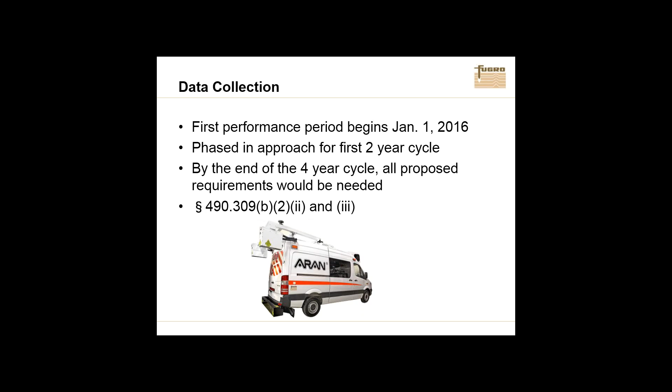The first part of this is I'm going to do some quick review and provide some of Fugro's perspective on MAP 21 and some of the issues that we're trying to raise, as well as encourage you to address and comment on some of these things as well. And then we're going to hear from Mark Suarez of Louisiana DOTD. He's done a lot of good work on trying to show some of the issues that he's been having with the faulting data, as well as some of the cracking distress data. And then we're going to try and open it up a little bit.

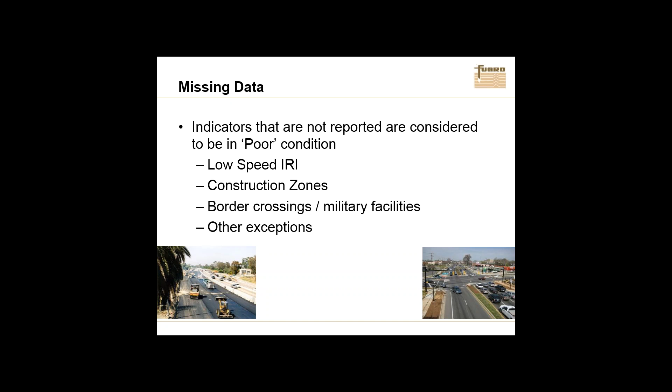And the biggest reason why you're going to need that information sooner rather than later is because you still need to set goals based on these things. And if you're not testing them and you're not trying to measure them relatively early on, you're going to have real difficulty trying to set those goals, never mind actually meet them. So I'd say that's one of the biggest highlights early on, the calendar and the schedule and how quick it's going to go by.

Missing data is another contentious one. Specifically, anything that is not reported is going to be considered in poor condition. However, we've seen in a lot of the data deliveries that we provided to you guys, as well as for anybody who's collecting their own data, there is a lot of data that does get either invalidated or oftentimes removed from the analysis. And there's lots of valid reasons to not want to trust the data even though you have collected it. Some of the more common ones are low-speed roughness. And while this doesn't necessarily apply to the interstate network, it will definitely apply in a lot of your urban areas.

Construction zones. This is probably one of the biggest ones on many of the interstates, where if you have a 20-year cycle, that means probably about 5% of your road network is going to be under construction at any given point in time. So if you don't generate information on that 5%, well, there's your 5% poor. That's set as your mandated rule in terms of your interstate collection. Well, it doesn't apply to everybody.

Border crossings, military facilities. When we're doing data collection, or if you're doing the data collection yourself, there's definitely a whole bunch of areas where people don't necessarily want the video cameras and the measuring technologies. So how big of a buffer can we leave around these, and are they just going to get classified as being poor? There are, of course, other exceptions. While there is still some discussion in the document about being able to temporarily leave out that outside lane, how long is that going to last for?

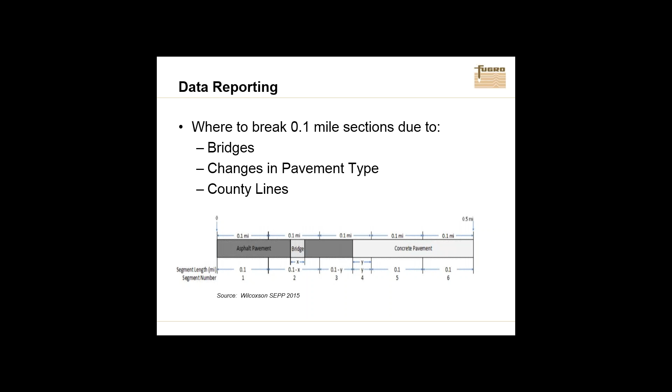One of the next big issues we're going to face is data reporting. Everything's in 1/10 of a mile, and it's tough to give an exact number, but it's probably around half of our customers currently getting 1/10 of a mile and don't have to change the reporting sections. There are definitely some with smaller increments, and some with larger increments. While it may not be that difficult to give two tables in the case where there is a change, that way some consistency can still exist from year to year, as well as continue to meet these reporting guidelines. So the questions are still going to come up as to how we break these things down.

This is one of the biggest issues, and I stole this picture at the bottom from a presentation done at the Southeast Pavement Preservation conference.

What it becomes is there are a couple things where we know we're going to have challenges reporting some of the data. The two biggest ones that this chart clearly shows: first, there is some guidance saying that we do not have to report some of this data on bridges. It doesn't take much looking at your network to know that roughness always spikes on bridges, primarily due to the existence of approach slabs, leave slabs, and all the expansion joints that occur on the bridge. So we know these are going to be spikes, probably above the threshold to become poor. That's a known issue, so they've addressed it by saying we don't need to report issues on bridges. That makes sense too, because clearly you're not going to necessarily have that much cracking on the bridge decks — the surface material there is not necessarily thick enough. But the problem is, how do we remove these bridges?

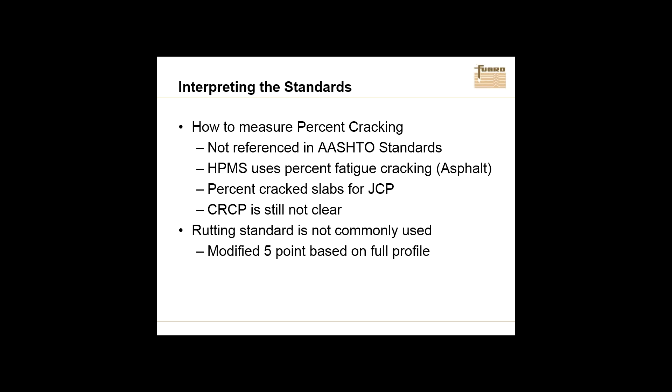You can look at some of the other sources that are also referenced. I've got a copy of the HPMS field manual in front of me, and pretty much for asphalt paving, it just uses percent fatigue cracking. While that may be adequate and not necessarily difficult to measure, the question becomes: how have you historically measured this distress, and is this something you want in addition, or something you're going to start to change and modify pavement management systems to address? In terms of JCP, percent cracked slabs is probably relatively clear.

The only key is we start getting into definitions of what counts as a cracked slab. If you have partial depth cracks, corner cracks, or things such as D-cracking or durability cracking, are these going to count as a cracked slab? While not necessarily difficult, whichever way the rule comes down, clarification is needed to make sure we are being consistent and that this is getting applied the same way for all states.

CRCP is probably the one that is the least clear. While they reference many of the standards, it's not clear how to determine percent cracking at all. They do reference that things such as pop-outs and spalling are to be used in terms of percent cracking, but we're not exactly sure. Does that mean we're just taking the area of the pop-out, or are we taking it as a percent of length? There's a lot of gray area here, and it's not well referenced definitely in any of the AASHTO standards exactly how to deal with that.

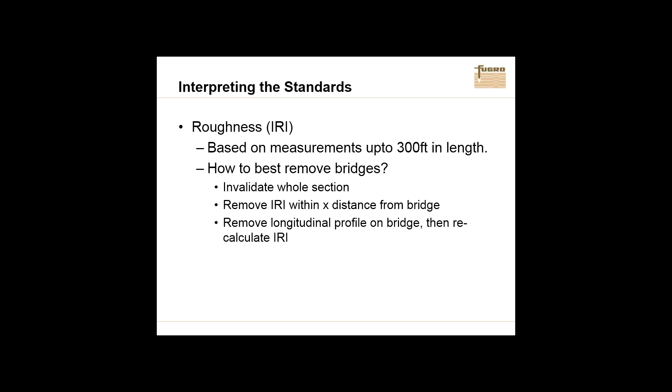In terms of using the whole profile, I would definitely encourage you to read this. Pretty much it is a modified version of the 5-point. It is not using a simulated straight edge or anything remotely like that. In actuality, what it's doing is telling you to take an average value in the center of your roadway, an average value of a range of your profile in both of the wheel paths, as well as on the outside. Then it uses a bit of a rotation scheme to determine what the rut depth is within the wheel paths and to try and determine if there is a center rut rather than in the two-wheel path. So it's definitely a very different system than what many agencies currently get reported to them.

Once again, that doesn't necessarily mean it's bad, it just means it's going to be different. So be prepared that if you're reporting this, you may want to also continue to get your other data reported separately.

In terms of roughness, this is one that different agencies had different amounts of questions about. Some seem to be pretty okay with it. A lot of agencies, specifically the southern ones, who are less likely to be dealing with transverse cracking issues as regularly, thermal cracking, or ones that don't necessarily have frost heave issues as well. It's just important to realize how the IRI is calculated and what this can be impacted by.

First, it's important to keep in mind that the roughness measurements are based on sections up to about 300 feet in length.

As mentioned earlier, we still have discussions about how to remove the bridges. There's discussion already going on with FHWA about whether we want to invalidate the whole section of road—if there's any part of a bridge in that 1/10 of a mile, can we just remove it all? There's still a bit of discussion, though. What happens if the bridge starts just inside the new 1/10 of a mile section?

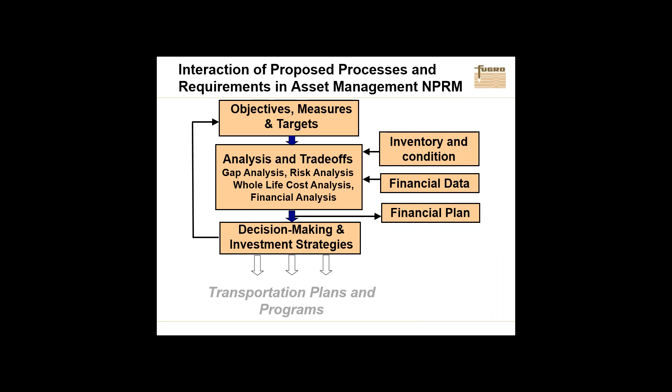The big difference here is this is a relatively new standard. There is an AASHTO standard—it only came out in 2013, and for many of you on the phone, you've been receiving faulting data for many years prior to 2013. There are no other real national standards—no ASTM standard for faulting, no ISO or other international ones, really. There's a whole bunch of guidance on how it can be done, but very little in terms of actual standards.

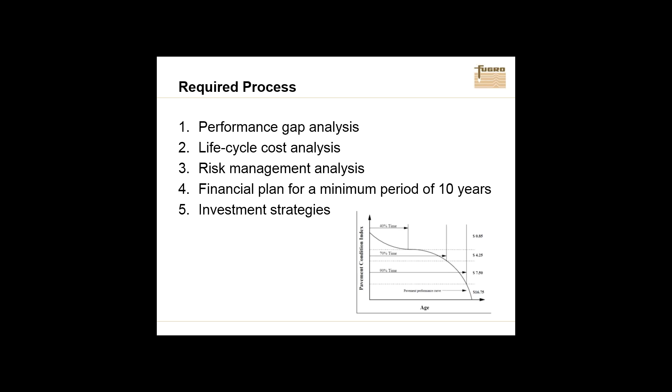The existing AASHTO standard, which I do encourage you to read, primarily uses the roughness-based system—just the laser and the accelerometer—trying to identify exactly where the joints are because there's a small discontinuity in that longitudinal profile.

The key is, if you have a lot of smooth joints, it's very possible to not identify a joint. If it's a smooth, consistent profile, that joint just does not get detected.

What happens, though, is if you have 2 or 3 joints that are badly faulted, this greatly brings up your average. For example, if you have a 1/10 of a mile section and only 2 joints are detected with a faulting of 0.2 inches, out of say 30 joints actually in place, your average would be 0.2, which gets marked as poor condition. However, if we knew all those joints were there and added them in with a faulting height of 0 millimeters, that average would come way down, and suddenly it would be acceptable—a good measurement. So the problem becomes: how can we be sure that all of those joints are indeed identified?

In many cases, in the results being used and the processing being done, a minimum threshold is currently being implemented by many agencies that removes all small faults. And we've done this for years, long before this AASHTO standard, simply because we were afraid of false positives. We would rather remove faults that you probably weren't going to fix and just identify a count as well as an average fault height.

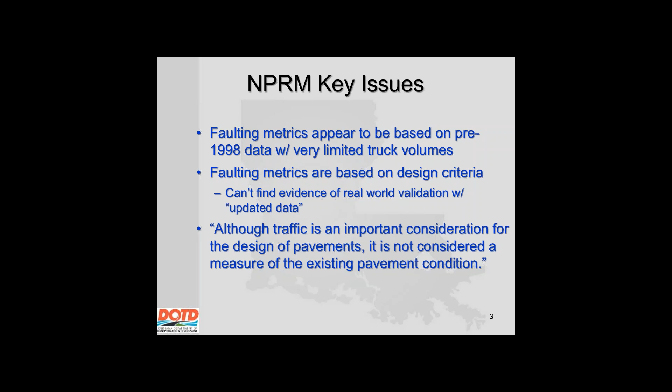So that's why over many years we've had lots of discussions with many of you and set up different rutting protocols. One of the more common questions we ask new clients is, how do you currently manually measure rutting? And inevitably, we show up on site and somebody's holding a straight edge or a piece of wire and a ruler. And we've done our very best to make sure that we're measuring rutting the same way that you have always manually measured it.

The problem is the AASHTO standards, the way they're currently written, don't try to match the manual methods. They try and simplify the automated method. So the short answer to your question is it's not well documented in industry. It's not well documented in standards. But Fugro has all kinds of documentation. If you want more information about exactly how we are accomplishing this, feel free to talk to your project manager or customer support team, and they can help get you some of this information.

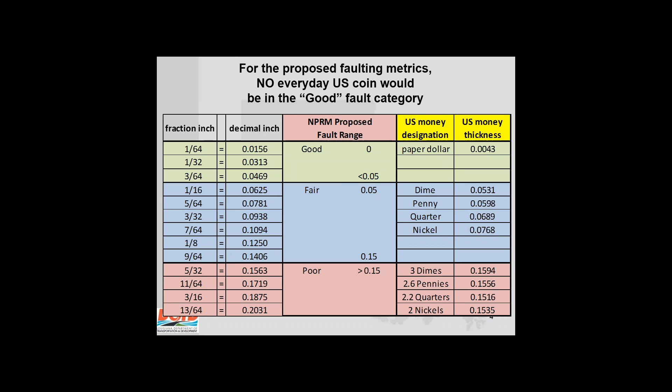Right, at this stage, I'm going to try and turn the presentation over to Mark Suarez. I'm going to try and change the presenter here and give him the option to share a screen. Can you hear us there, Mark? Yeah, I can hear you. Good. Why don't you just bring up my presentation? I'll tell you to advance the slide. That would be easier. There we go. It should be up on your screen, just tell me when to switch slides. Okay, it's definitely up on my screen. Go ahead and go to the second slide.

All right, and that just reinforces what DJ said a minute ago about the dates. May 8th is the National Performance Measure, so it's coming up on us pretty quick. Go to the next slide.

I had a lot of issues with the rules. I've been reading them. It's like 284 pages of rules, and you read all the research documentation that they reference, and you're looking at probably about 4,000 pages to read. They reference all this research and say this is based on research and data. When you really dig deep enough, you can't find the research and data that they used. And I found out that the metrics would appear to be based on the pre-1998 data, where they use like 10 million ESAL trucks instead of the more current volumes that are coming up now for pavement design.

So I think the data's dated, and I think the truck volume's almost minuscule. I had a big write-up about it. I can send it to you all to read if you want, but I'm still working on the document. But the faulting also has some issues.

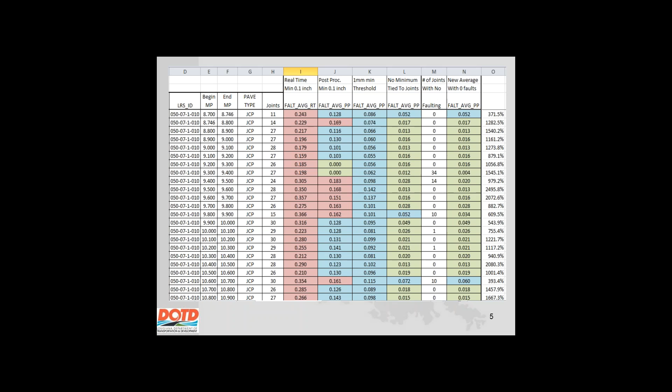And just remember what DJ said earlier, if you find one fault in a 1/10 of a mile segment, whatever that fault is, that's your average for the 1/10 of a mile, one fault. So next slide. We decided to look at some real data. This is an older pavement on an industrial corridor. I drive it every day. In fact, it's the road I use to get to work.

Well, when you look at the real-time data, basically what they do is in the vehicle, they run real-time with a minimum 1/10 of an inch threshold to kind of eyeball the data and make sure it's not way out of whack and they don't have some issue with the sensors. Now, some of these guys are really using real-time data instead of paying for all the post-processing, and this is the kind of numbers you're getting. The red identifies that it's in the current proposed poor category.

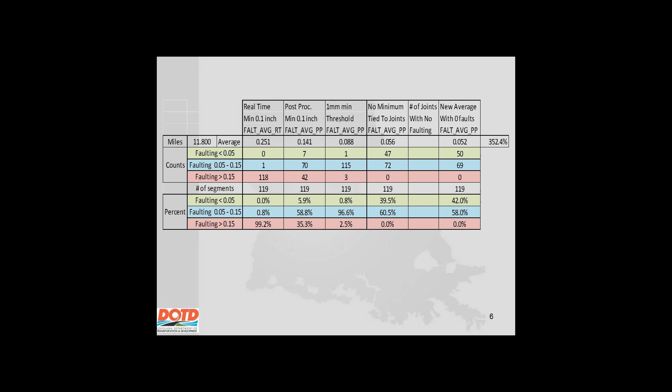And when they post-process that same exact data with the same minimum threshold, they eliminate a lot of false positives and get some better numbers. Clearly the 0 on a couple of those 1/10 of a mile segments is inadequate, but you're starting to see something that makes a little more sense. Okay, now this is this segment.

The point of the slide is if you look at the 1 millimeter threshold that they set, those numbers seem reasonable. You're talking about a very old pavement on an industrial corridor. Those numbers seem reasonable and give you a false sense of security that it's good data. But the numbers go down compared to the real time with the post-processing because they're finding a lot more faults, but they're not finding the fault for every joint. So the numbers look reasonable, and it kind of makes you wonder.

So what I had DJ and them do was go back and identify every joint and set no minimum and run the data again. Now we're looking at the real joints in column L, and it has no minimum. All of a sudden, those numbers are legit. Every joint had a fault, and it was measured, and if it was 0, it was averaged in. So on that industrial corridor, you got a good category on an old industrial corridor? Well, we did a big joint repair on it a few years back. So those numbers are pretty much legit.

Now the M column, if you look over to the left, they've got the H column that tells you how many joints they found in that 1/10 of a mile segment. Then you get that one that has 34 joints.

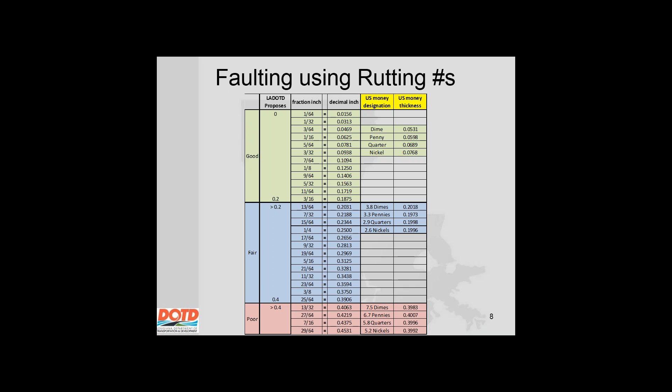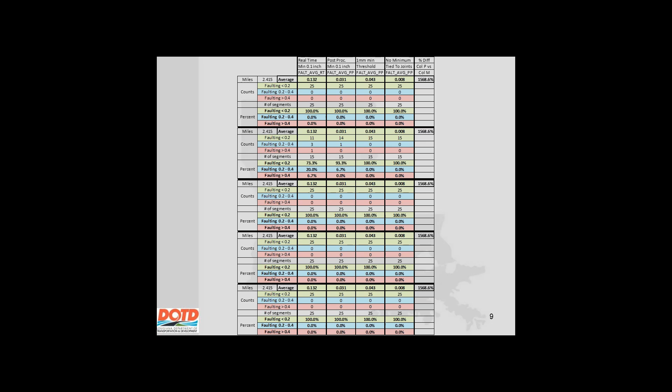Now, when we look at the faulting data and we use the rutting measures, 0.2 is good, 0.2 to 0.4 is fair, and 0.4... I mean, rutting's a safety issue. Faulting's a pavement condition issue. Why would the faulting numbers be more severe than rutting numbers? I don't quite follow that, but if you look at these numbers, you've got to get your coins out.

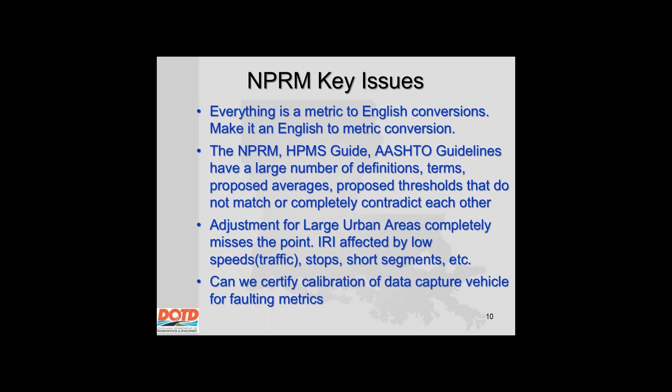And when we look at this data on the 0.2 measures, the 0.2 to 0.4 stuff, now your real-time numbers are livable. Your post-processing numbers are livable, but truly, legitimately, the no minimum tied to joints is the most accurate and legitimate one. But you start looking at the real-time numbers based on these 0.2 and 0.4 measures, and there's a little more validity to the faulting numbers. It seems to make these numbers more reasonable and more acceptable.

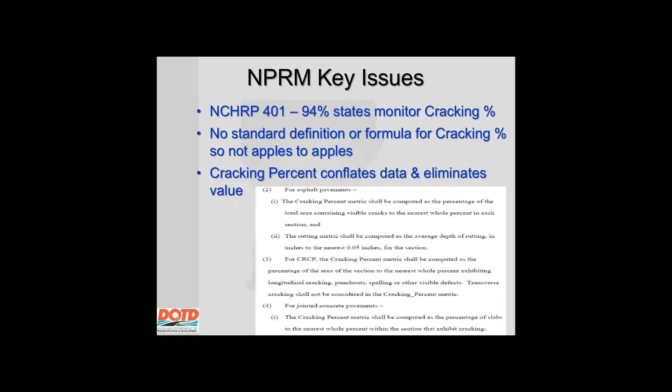Can you get the wheel path exactly the same every time you ride your 3 or 4 or 5 calibration runs? And can you match what the other guy ran? Because it might be different across the pavement. You're not getting faulting across the whole pavement, you're doing it in the wheel path, so to speak, or maybe you are, I don't know. But I don't know how we can calibrate the vehicles at the calibration level. So I'm asking to have the feds make sure that data capture vehicles can be calibrated for the metrics they're proposing, especially faulting. Next slide.

Well, you're talking about an area measure, like fatigue cracking is an area measure, and longitudinal and transverse cracking are linear measures. Your pavement segment's area, so for fatigue cracking, an area measure on area is fine, you can come up with a percentage, but how do you calculate a linear measure and convert it to an area measure to get a percentage? You need a defined formula and methodology, and they haven't given us that. So basically, you can make up your own methodology, and that's what everybody's been doing, reporting it in the HPMS response. Everybody's reporting stuff that's not really apples to apples, so they're not really reporting percent cracking in a way that's usable or comparable, as far as I'm concerned.

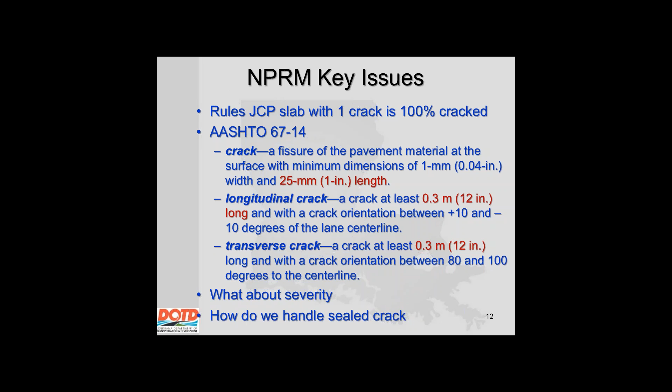I don't see anywhere in the document where they indicate how to determine spalling, okay? And I don't know what the hell other visible defects are either. If you look at that little printout, they talk about spalling and visible defects. Well, why don't you define what they are, tell us how to measure them, and tell us how to report them? Don't just say other visible defects and spalling. So that kind of stuff.

And basically, it comes down to this: we're only going to capture what we have to capture and what we're mandated to capture, because most of us can't afford to do any more than that. So people who are just getting into this are not going to capture every single thing going on just because they wishfully point it out to us. So we need to get a little bit better with that. Next slide.